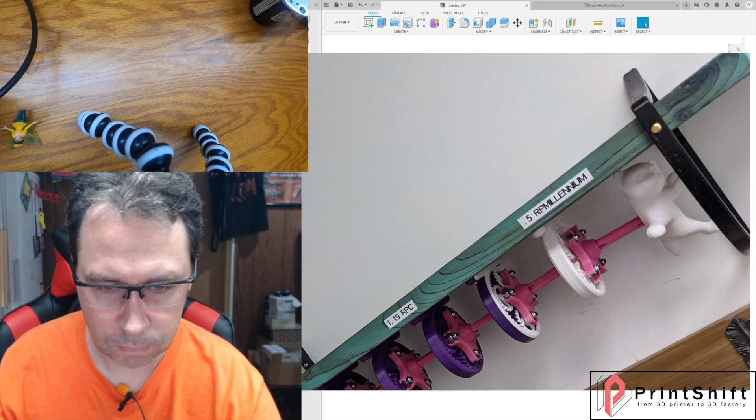Bit of a tragedy - SpaceCat is no longer spinning. It's a kinetic sculpture that will spin once every 2,000 years, using a series of gear reductions powered by a synchronous motor.

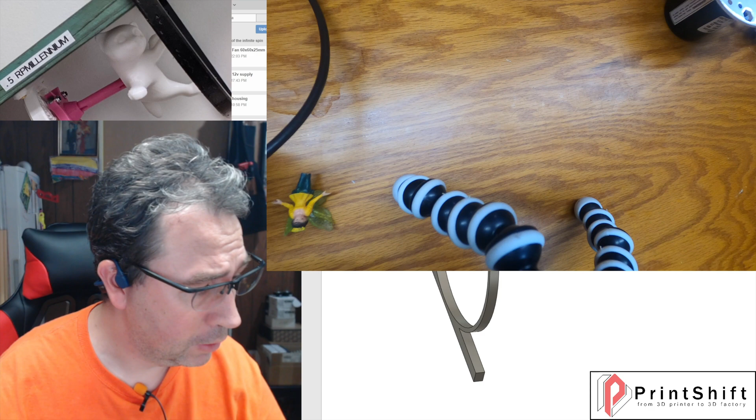The first generation of SpaceCat used a DC Synchronous Motor, which isn't really a thing, but this little part here converts the DC into an AC signal. I did take the heat shrink off one of these - it's literally just a black blob underneath there.

It generates a sine wave, apparently. But predictably, you can see this one's already loose. This one's brand new - threw the broken one away, but it's already quite loose in there. Did not last, so of course next time we used a larger one.

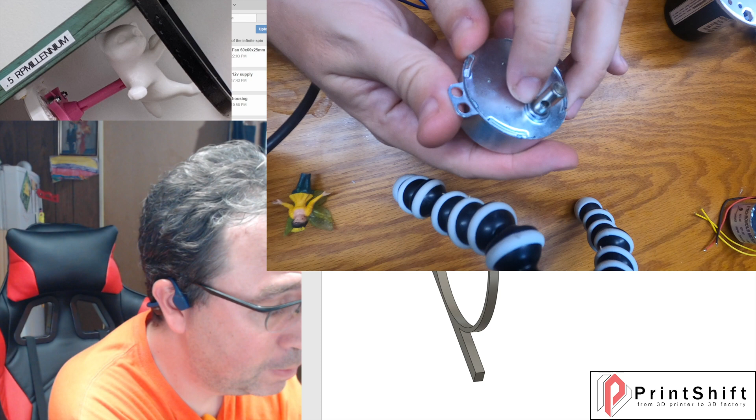This one runs on AC 100 volts. I was trying to use DC just for safety in the project, since something you're going to leave running - but the idea is to leave this running forever, and this bushing here wore out.

It's quite loose in here now - it's a hardened steel bushing. But after a while, with the starting and stopping especially, I do have the sculpture on a little infrared IR sensor, I'll show you in the main one. So this motor, also trash.

So that brings us to today. We need to redesign SpaceCat's drive system to use a larger motor. That last one was 4 watts, this is 10 watts. AC again - I do have it hooked up for testing.

I'm going to put a bunch of LEDs in here as well, plus a cooling fan. One thing about synchronous motors is they get quite hot - there's very low load, but it's just pumping AC through resistive elements.

In order to combat that, I had a laser cut part made - half heatsink, half housing, half mount for everything. Just kind of look nice. These holes around the perimeter are the LEDs.

And these 4 holes here line up, and the hexagons are there just to look pretty - a little more surface area.

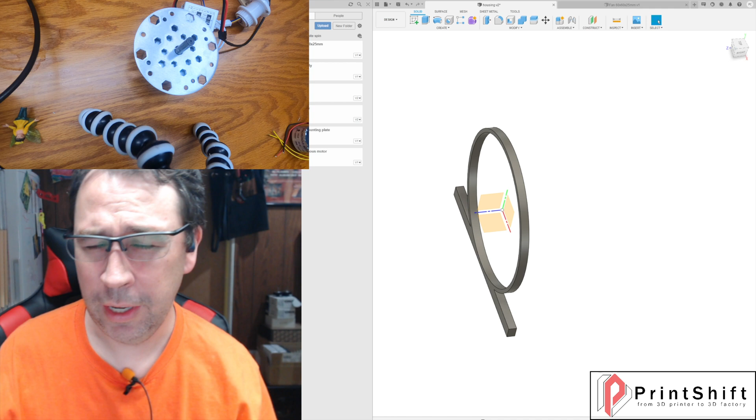So designing an enclosure, I figured, is something people do reasonably often. I've already imported this guy, which has the center 100 millimeters from the base, and the base the same size as the existing mount. The other thing I did is grabbed all of my components and brought them in.

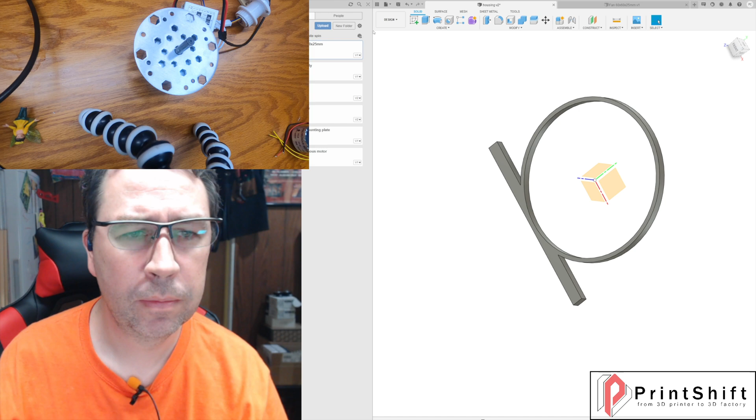So when designing an enclosure, the first thing I do is I design all of the parts that I want to enclose, and that way I can play with them and move them around.

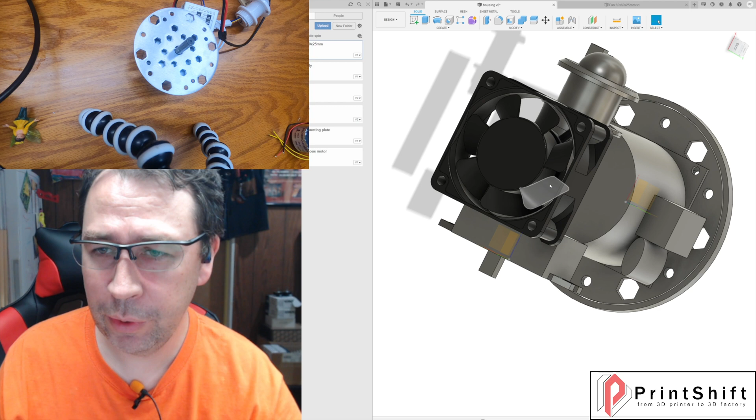So the fan - see, that's a very nice model, beautiful, accurate. It's because I downloaded it. You can generally find step files of most common parts. I probably could have found some of the other components if I looked hard enough, but it's quick enough to design - I mean, I made this part, so I already set the DXF up for it.

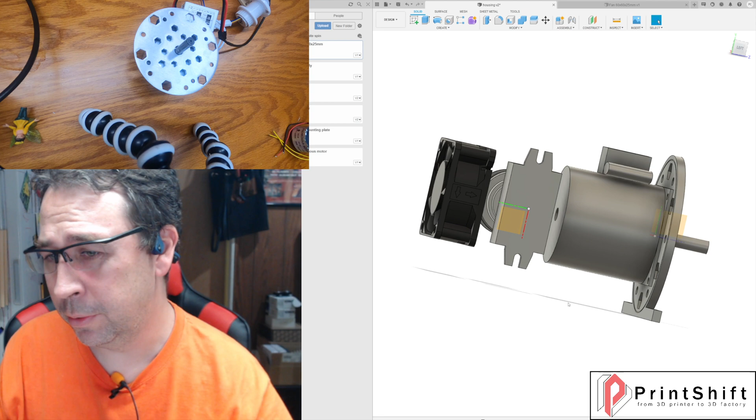And it's like, how do we want to build this around it? All we really have to do is seal it up. The way I was thinking about doing it is have everything feed in through one big hole here, so we're making a single part faced by this plate. I'll hold it in with maybe just some zip ties or rubber bands, something to clasp it in. I might even just dab some silicone on there.

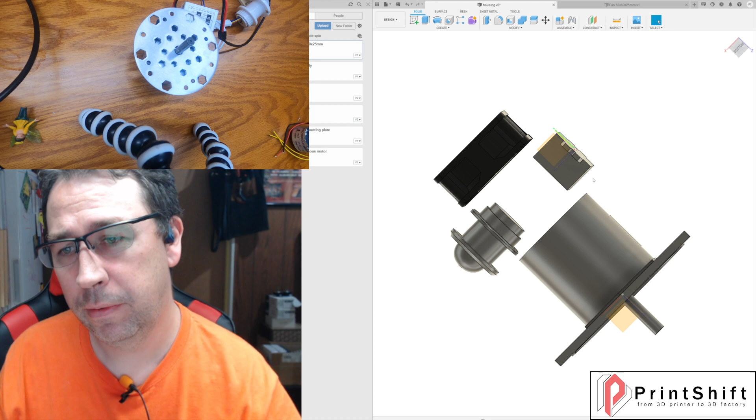So one of the things I want to do is reduce vibration, make this a nice quiet machine. I feel like giving this a square cross section in the rear, having that come up for a ways and then fan out. So let's start there.

We're going to modify the motor because I think that will make my job easier. I'm gonna go grab a real screwdriver.

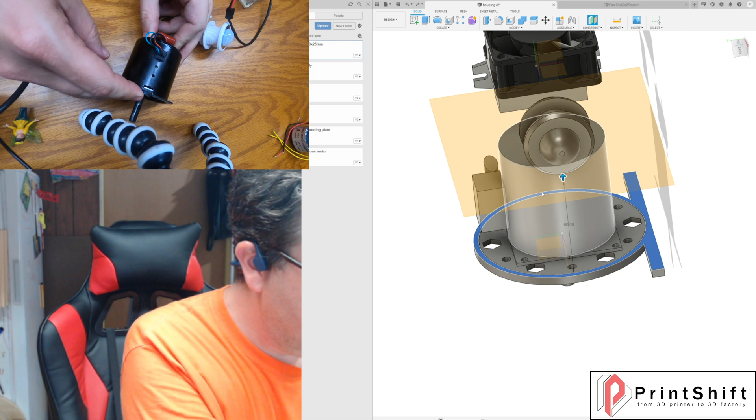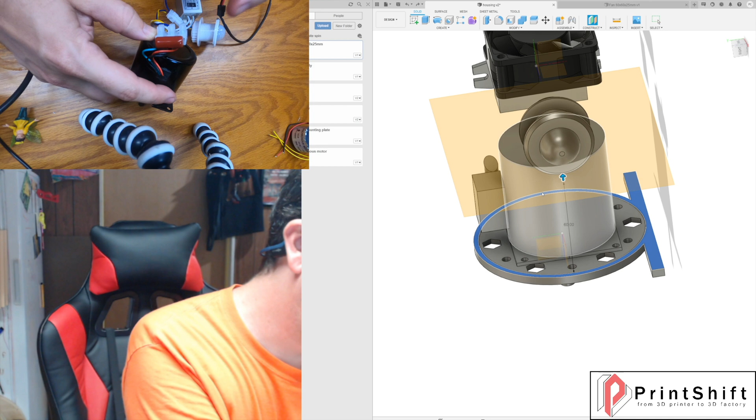So I can move that around to the base. I'm not going to drill holes in the base, and this would actually get too hot for hot glue, so I'm not sure the best way. You generally don't want the wires moving around - just better to keep them secured, but we'll plan to route that to the base because it fits nicely, and we should have our model reflect that.

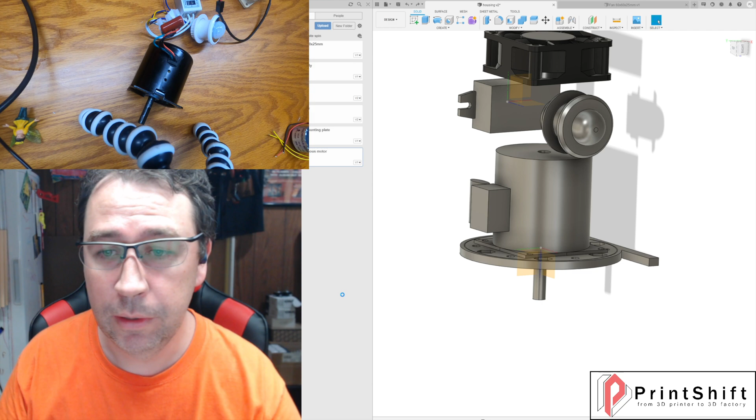We're going to cancel that. I'm going to open up my synchronous motor and edit this part. This doesn't need to be high precision. We're not printing this, we're just trying to get a mock-up so we can design around our parts.

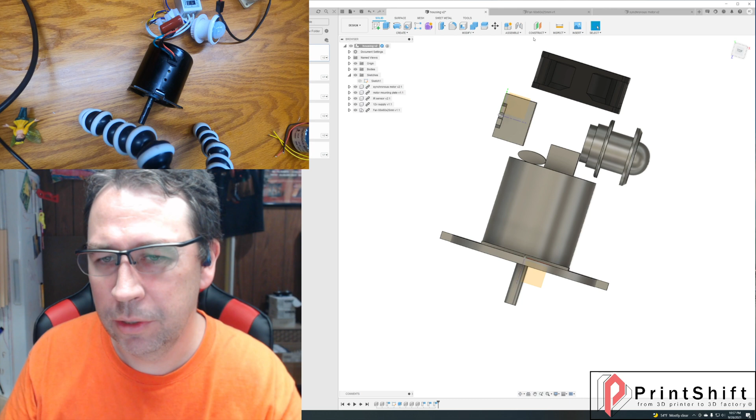See the exclamation mark? I can get the latest version, and now this just fits between those. Looks good, no longer on the side. We can't move these parts in too much, but we can do it a little bit and move that over, because generally I want to streamline things and make it look a little smoother.

Back to our offset plane. I'm going to be building up from this highlighted blue ring. If you try to make your enclosure as small as possible, it gets very hard to integrate, and I'm kind of thinking I need to shove my hand in there to get all the components.

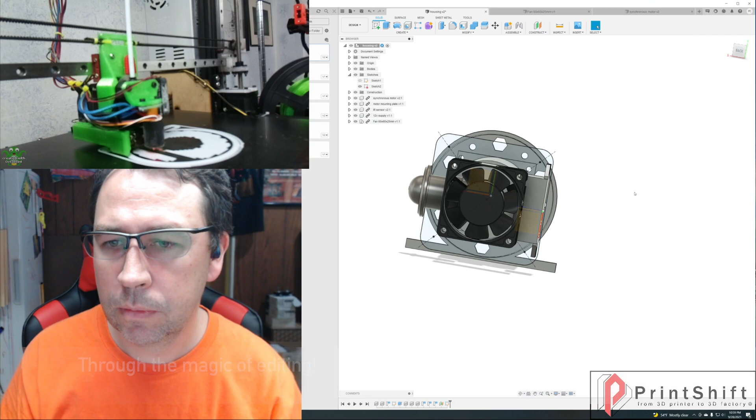That's a 2.5mm wall. Use the loft tool, take both of these parts and loft up. It's always a much better look doing multiple lofts — one for the solid and one for the hollow.

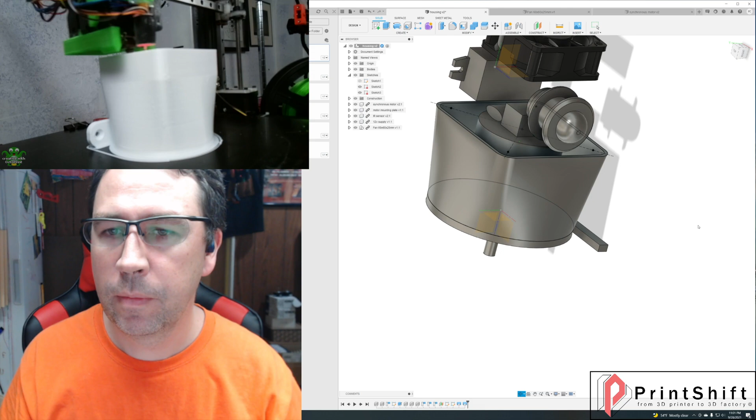We do need to extend this base a ways. I'm going to go back in time to do that. The only purpose behind that is so that when we extrude this, we'll have some meat on it. Good thing it didn't ruin anything.

Never seen that before.

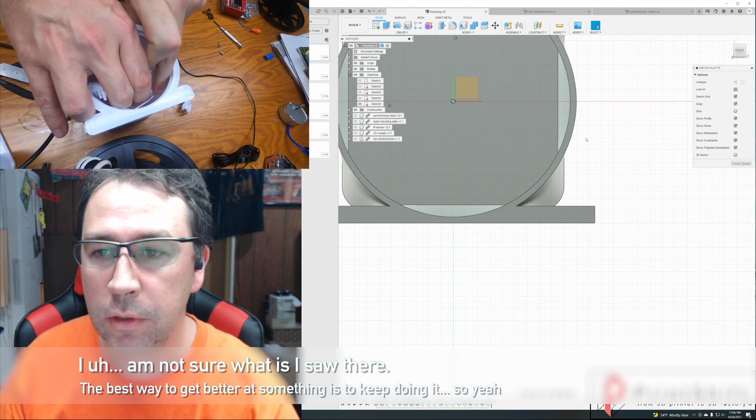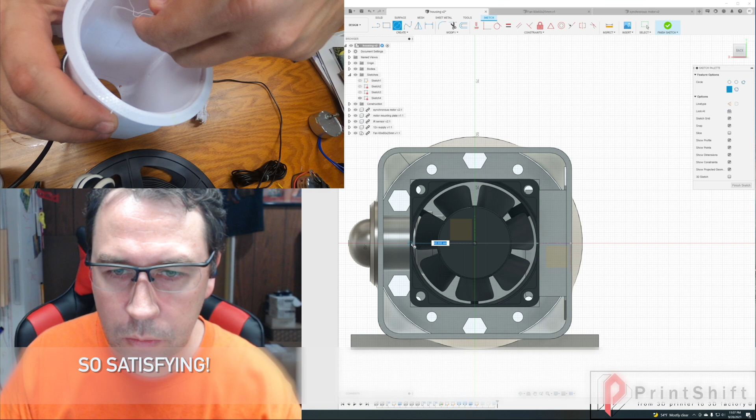So now we're going to make the holes for all the parts.

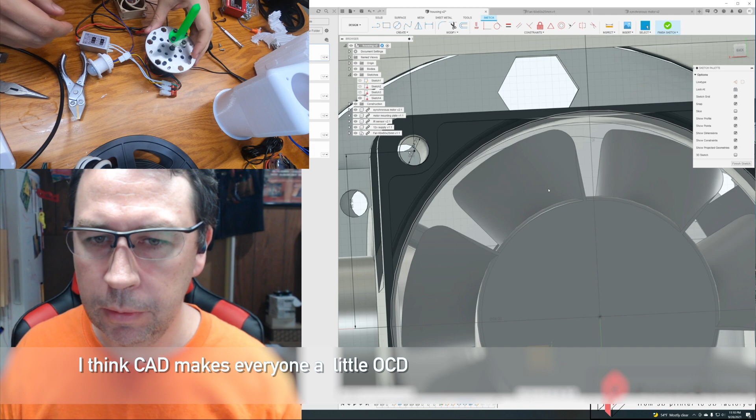So this fan is just not perfectly centered, that's the issue. You can see we're off a little there and there, and they're all in the same direction. That's what happens when you get CAD files from the internet — they're not always perfect. I'll survive somehow.

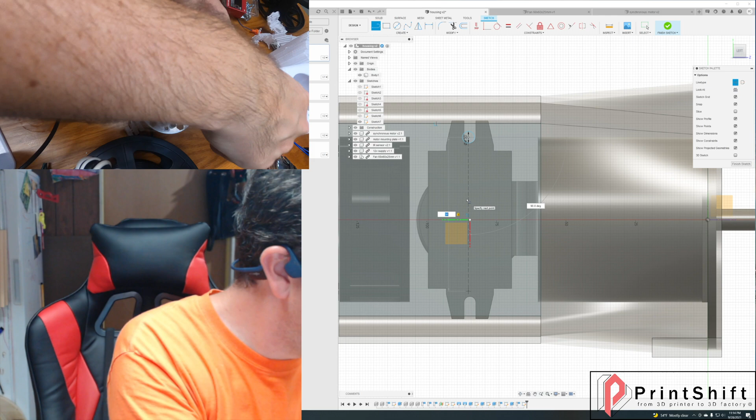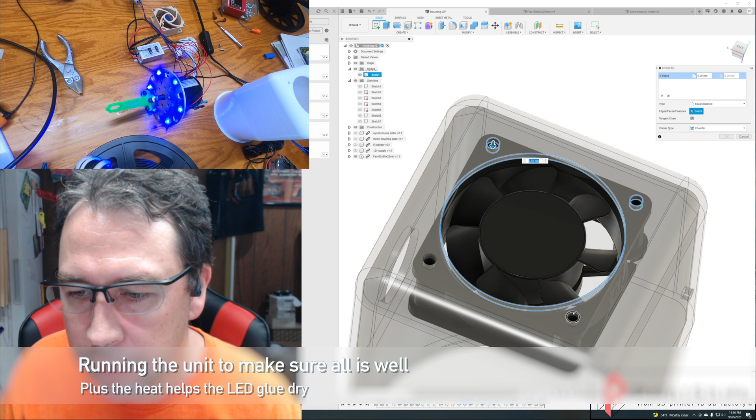The main reason to chamfer all this is to reduce the amount of support needed. We'll do the same 10mm round that we have on the outside there. You'll see I have little thick corners at the base, just going around and chamfering all these holes to make them look nicer — just 0.5mm, but that really improves the feel and look of the print.

Oh, I forgot something quite important. I need to put something behind the motor mounting plate so it actually stays in place. It's a little late to be thinking of that now — I even planned on it, I just never actually did it.

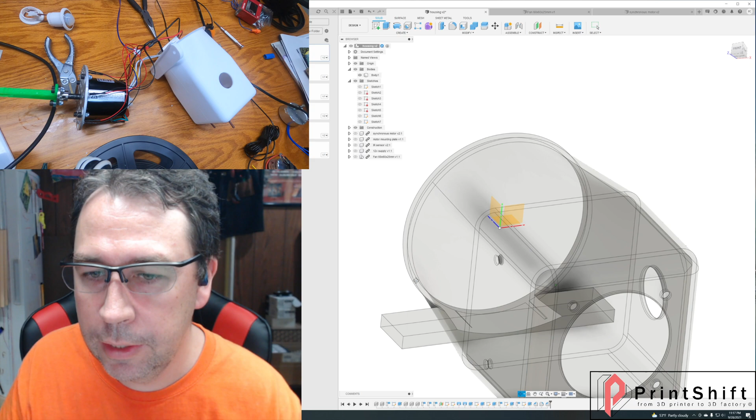So that gives us the lip we need to have a mounting plate, and there's nothing behind it, but that's just fine.

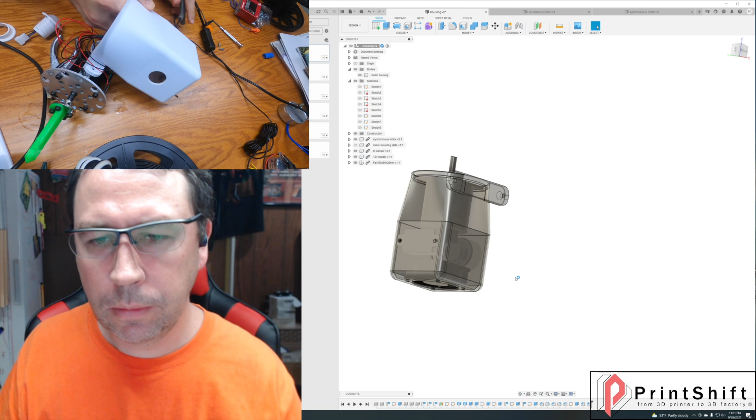It's pretty cozy in there, but I think that's worth a print. We'll see how it goes.

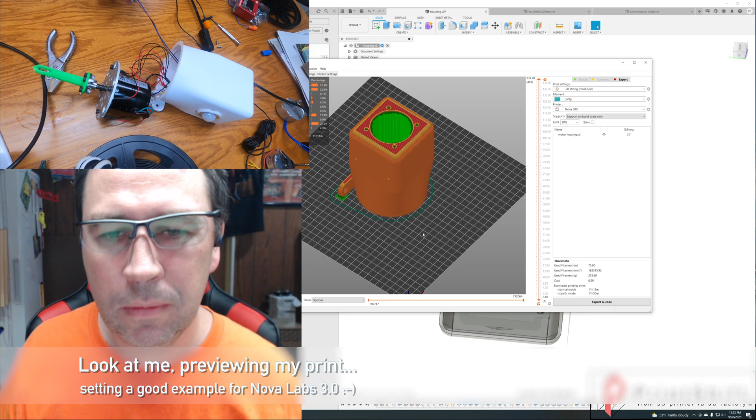Let's see what it does with support. I feel like it's going to go crazy. And that's not terrible. Kind of don't want support on the bottoms, but whatever. Give me a brim too, though.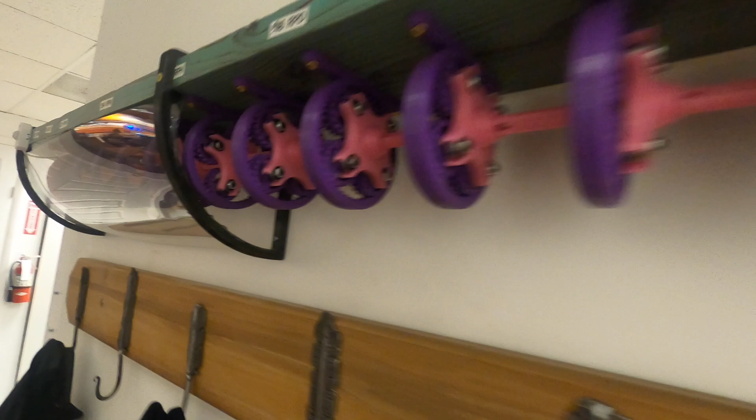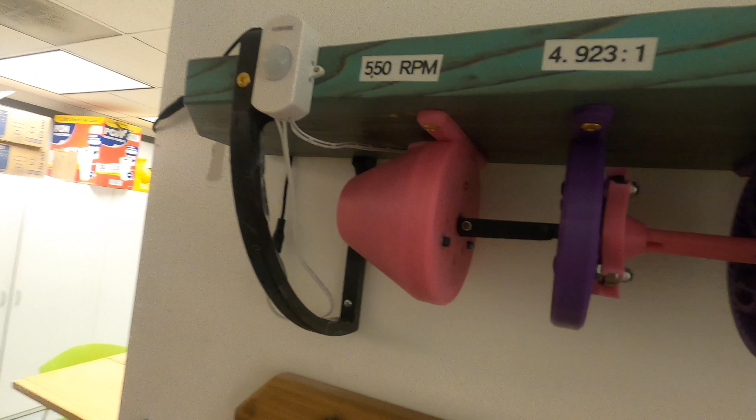So this is the SpaceCat of the Infinite Spin. The old motor unit died after about 6 months of operation, so we're going to replace it with a new one, only slightly larger.

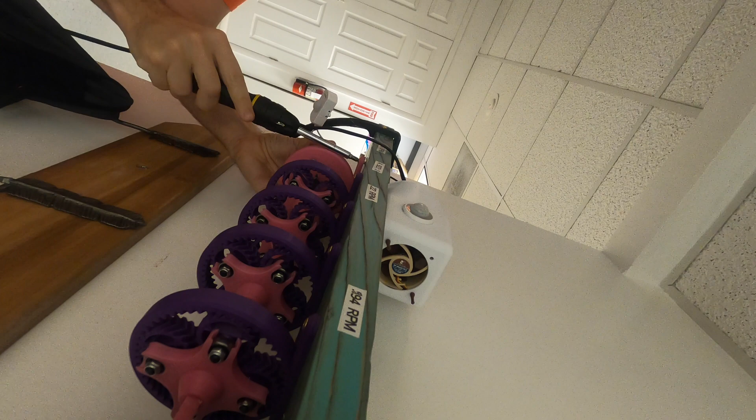They're basically all the same components as the new one, but this is DC — weak, small. There's what this looks like underneath, oh look at that, apparently that's what failed. So maybe the motor's still good. Oh well, still gonna put the bigger one in, since I've spent all the time making it.

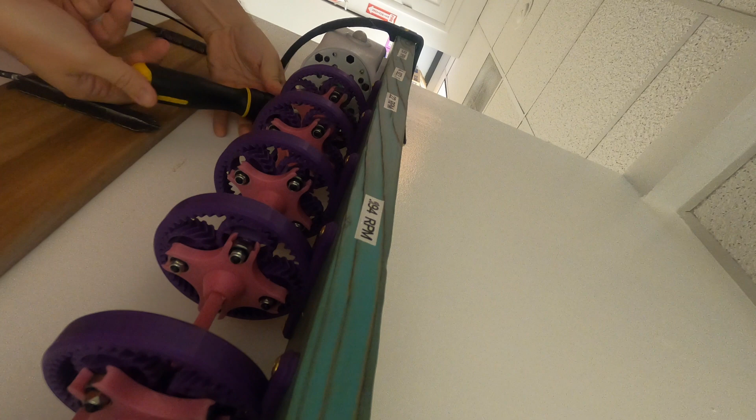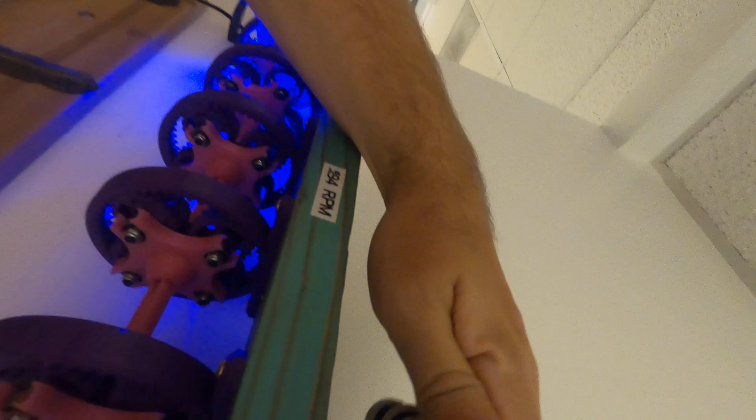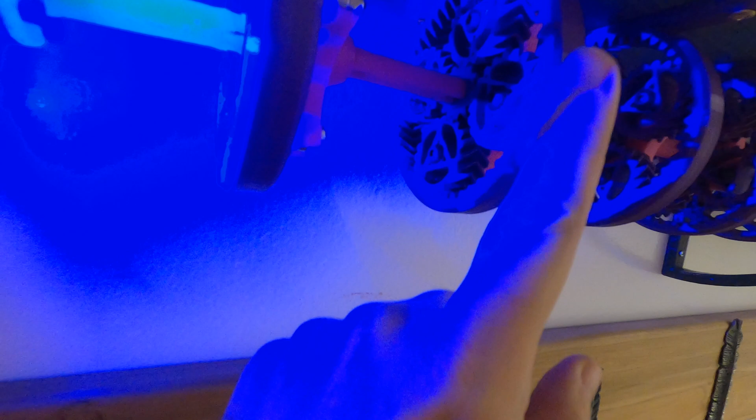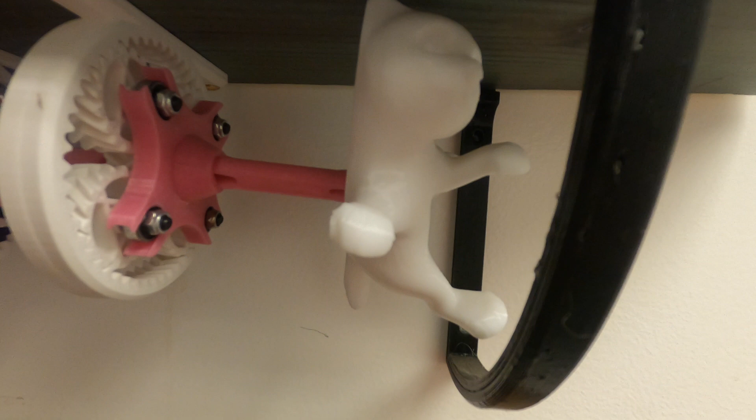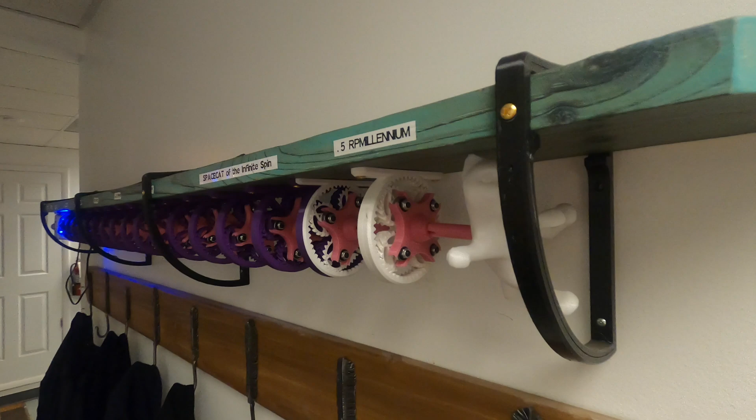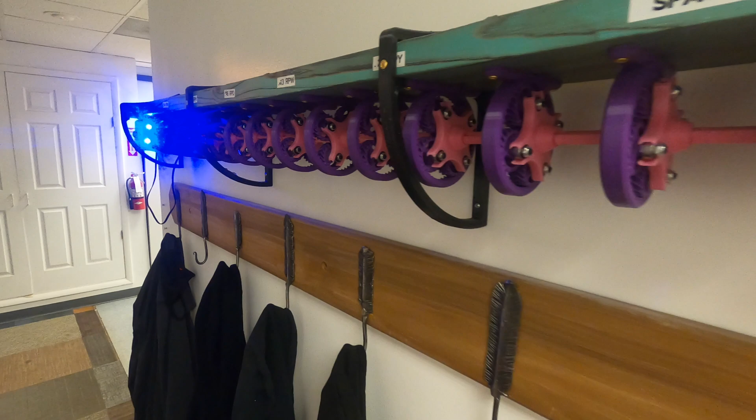So this is SpaceCat of the Infinite Spin, sort of a tribute to Arthur Ganson. He did something called a machine with concrete, where it went through a whole lot of gear reductions just like this, except his were worm gear reductions. I don't remember how long his would take to spin once, but I thought it would look cool with planetary gears.

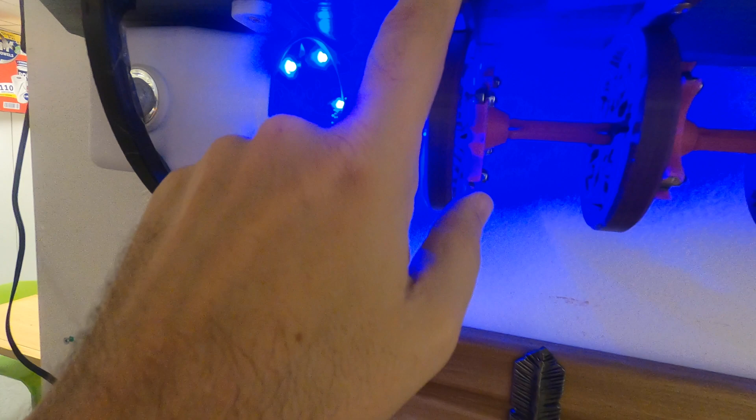So we start here, we're at 60 RPM. These guys were for the original motor, which has been long dead. This guy is 1/5 of that, basically 5 to 1 is the gear ratio. So 60 divided by that, times 1 through 17 stages — basically 60 divided by 5 to the 17th will give you your rotations per minute. Basically none.